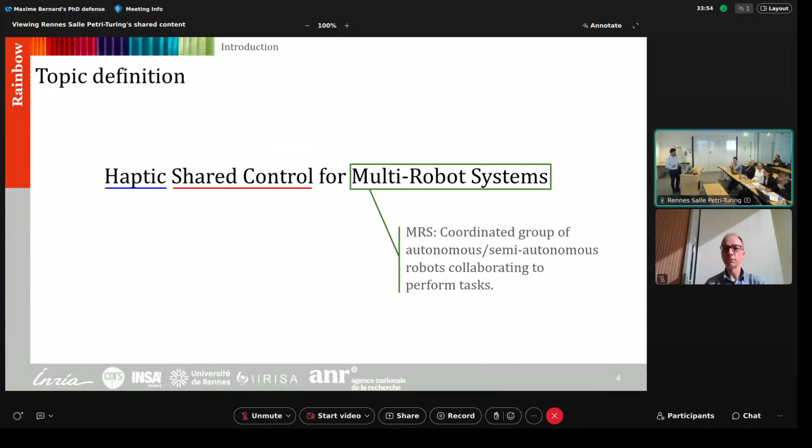So let's start by defining the topic of this thesis. A multi-robot system refers to a group of autonomous or semi-autonomous robots that are designed to operate collaboratively within a shared environment to achieve common or distributed goals. They rely on coordination strategies, communication protocols, and task allocation methods to function effectively as a collective.

On the second hand, shared control refers to a framework where both the human operator and the robotic system contribute to the control of the robot. The control authority is dynamically or continuously distributed between the two entities, and the goal is to combine the strengths of human intuition with the precision and accuracy of robot autonomy. It is especially valuable in complex or dynamic environments, such as assistive robotics, teleoperation, or search and rescue.

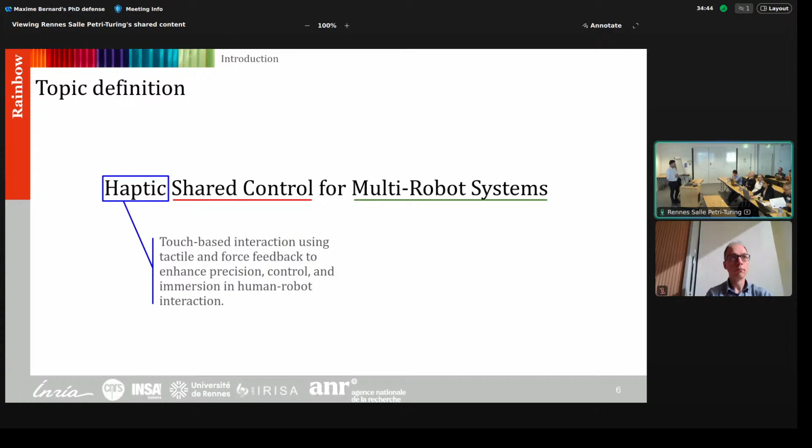And finally, haptic in robotics refers to technologies that provide tactile and force feedback, allowing users to physically feel and interact with remote or virtual environments.

So the outline of the presentation is as follows. I will start by presenting related works from the literature. Then I will introduce the first contribution, which is connectivity maintenance with field of view constraints. In the second part, I will introduce a few shared control approaches, allowing the user to control the group of robots with different levels of authority. And finally, I will conclude my presentation.

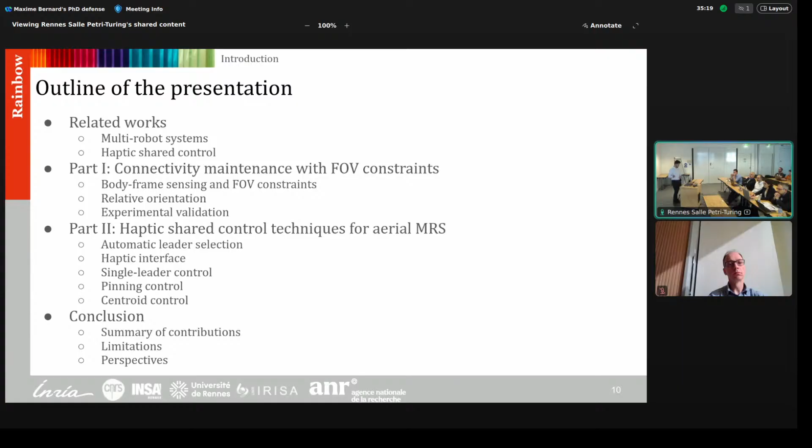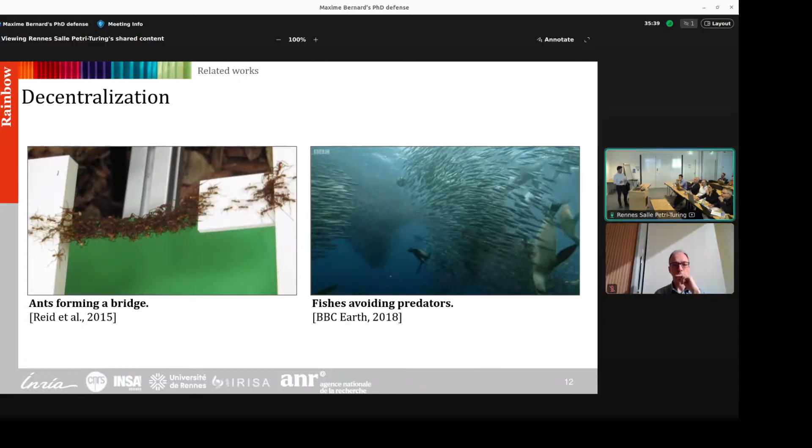So let's start with multi-robot systems. In multi-agent systems, scalability is often achieved through decentralization, which, unlike a central system, where a single controller manages all the agents, for a decentralized system, we rely on local communication and sensing to allow each agent to contribute to the overall objective independently. It can be seen in nature, such as ants collaborating to reach a distant target, or fishes that avoid predators and lure them with these big motions. So in robotics, decentralization is a central topic because it enables scalable and robust operation, which is fundamental for multi-robot systems.

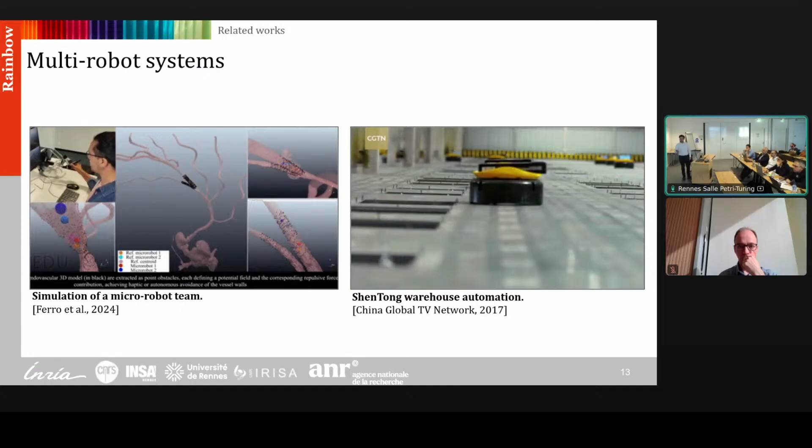So multi-robot systems can be used in a wide range of domains, such as surgical application or warehouse automation. So on the left, we see a shared control simulation where a human operator is controlling multiple robots in a vascular system. And on the right, we see a warehouse of a Chinese delivery company where robots help the humans to deliver packages.

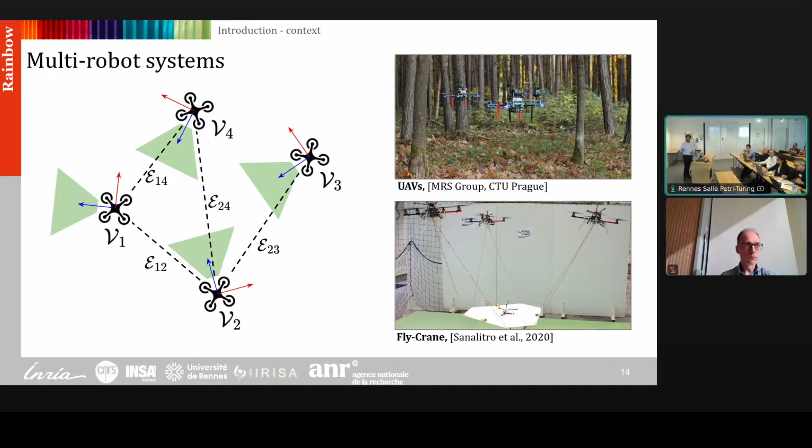So in the literature, various approaches were explored when it comes to control of multi-robot systems. We broadly define them in two categories: rigid formation control, which requires maintaining inter-agent measurements such as distance, relative position, or orientation constant. So that's what we see in the example here. Or flexible formation control, which on the other hand allows these measurements to change over time, which enables the formation to adapt to environmental constraints and task requirements, while preserving overall cohesion. So this example shows flocking, which is similar to the fish example we saw before.

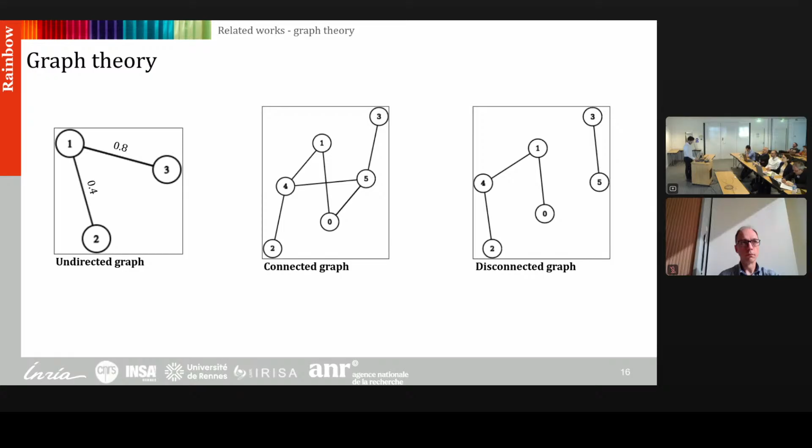When controlling multi-robot systems, ensuring global connectivity is essential because it's sometimes the main requirement for decentralized applications such as consensus, flocking, leader-follower strategies, or other collaborative operations. And so the connectivity maintenance algorithm enables the preservation of global connectivity within the team, which makes, in our opinion, a robust and essential foundation for any decentralized multi-robot application.

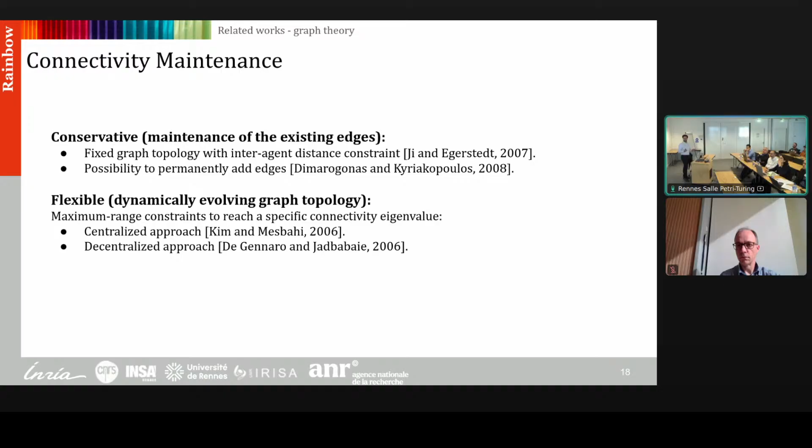And in the literature, for maintaining connectivity, we find two predominant approaches. The first approach is conservative methods, which aim to maintain the existing edges. Some methods allow for the appearance of new edges in the graph. However, no edge can be dissolved. On the other hand, flexible approaches allow for the dynamic modification of the graph topology, which permits adding or removing edges as long as global connectivity is maintained. In the scope of this thesis, we will focus on the second approach, and in particular, this work introduced by Paolo Giordano in 2013. This strategy is capable of handling complex sensing models and dynamically forming or dissolving inter-agent links while preserving global connectivity.

So we use the cost function of lambda2 to have a vertical asymptote when the value of lambda2 approaches the minimum value, and to smoothly decrease to 0 when the connectivity eigenvalue increases. And we designed a gradient-based controller that is designed to minimize the cost function V(lambda). So by having each agent of the group implement this force, the connectivity eigenvalue is maintained above the positive threshold lambda2 min.

So to implement the gradient-based controller, each agent follows the generalized connectivity force. And if we develop the control input for agent i, we see the element of the eigenvector v2 that is associated with the eigenvalue lambda2 appearing in the equation.

This value and the connectivity eigenvalue can be estimated in a decentralized way using a combination of different estimators. And we also see that if the weights in between the agents and their gradients are designed to be computable from locally available information, the connectivity maintenance law can be implemented by agent i in a decentralized way.

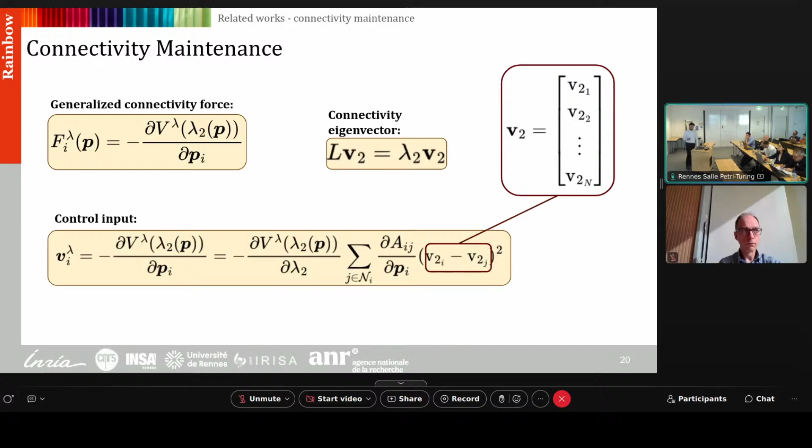In the literature, we can find many applications of haptic shared control in many fields, such as the remote operation of robotic arms. So the robotic arms automatically handle different constraints, such as collisions, joint limits, and singularities. And haptic guidance and shared control algorithms simplify the execution of grasping tasks.

Haptic shared control has also been applied to a team of drones. So in this work, the authors show how a human subject can be part of a robotic team while being guided through wearable haptic devices to maintain connectivity with the robotic team.

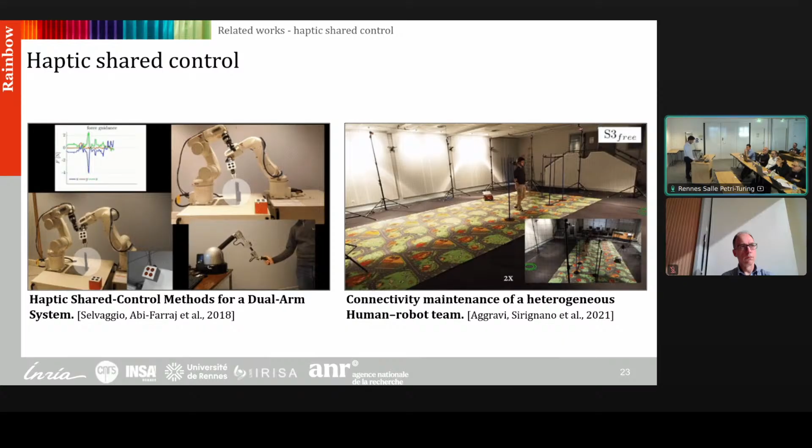So let's dive into the first contribution of our work, connectivity maintenance with field of view constraints. So all previous work in the literature on connectivity maintenance treated agents as point masses without orientation and assumed undirected sensing graphs, meaning that if one agent could sense the other, the reverse was automatically true. Our work challenges these assumptions to better reflect real-world scenarios, but introduces significant algorithmic challenges.

So we assume each agent is equipped with an IMU, a radio communication device, and a calibrated camera with a limited field of view, providing relative position measurements in the body frame of the agent. We consider measurements in the body frame of the agent instead of a common frame. And we propose to adapt the connectivity algorithm to account for this limited field of view sensor. So we need to extend the algorithm to control not only the linear velocities, but also the angular velocities of the agent. So the dynamics look like so.

The connectivity maintenance algorithm requires weights with specific properties. So they should remain constant at a maximum value when the agents are well connected and smoothly decrease to 0 as the connectivity weakens. And finally, the weight must also have a vanishing derivative as it approaches 0. So we introduced this standard interdistance weight that aims to keep neighboring agents within a bounded and desirable distance from one another.

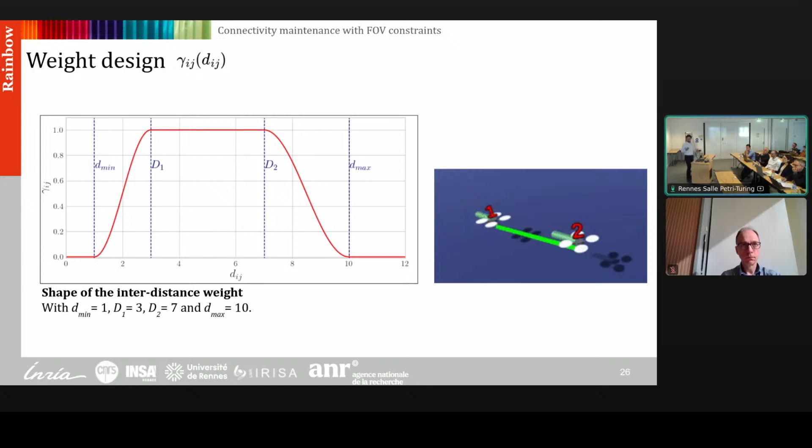So it starts at 0 when the agent interdistance is too small. It increases smoothly to a maximum value of 1 as the distance enters the preferred range. And within this range, it remains constant. And finally, when the distance is too great, it decreases smoothly to 0 again. In practice, this helps ensure that the agents remain within an appropriate communication range, and also that the onboard camera can perceive the neighboring agents, avoiding situations where the agents are either too close or too far away to be sensed.

The second weight we introduce is designed on the visibility function that we introduce here. So this visibility function depends on the cosine of the angle between two directions, the direction of the onboard camera and the direction of the neighboring agent. When this angle is low, the function is high, the weight is 1, which means that when the neighboring agent is near the center of the field of view of the onboard camera, the weight is high.

And as the agent goes away, the weight decreases, and we see the corresponding velocity input, which we will detail later, acting on the robot here. However, this function cannot serve as the weight directly in the connectivity maintenance algorithm because it's not symmetrical.

And while we consider asymmetric sensing capabilities, we need a symmetric graph for the connectivity maintenance algorithm. So to ensure symmetry in this interaction, we define the field of view weight as a composition of the visibility function. As two connected agents can communicate together, the relative measurement can be communicated. So we do not need to impose mutual visibility between two agents.

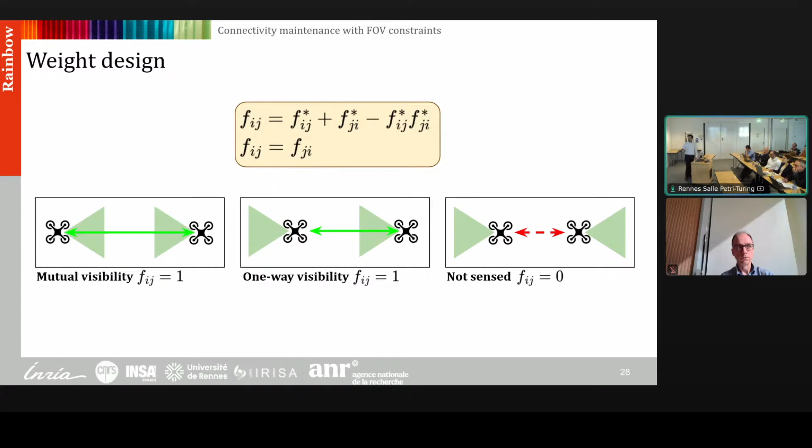And so this design choice allows the weight between a pair of agents to reach a maximum value whenever at least one agent sees the other, which is the case here. However, of course, when two agents are not able to see each other, the weight is 0, so they are disconnected. So now the linear and angular control input of the connectivity maintenance algorithm are defined as follows. So we recall that this value can be estimated in a decentralized way.

And by developing the gradient of the weight, we observe the appearance of a transition matrix. It appears because we consider body frame measurements, and it depends on the relative orientation between two agents. While some works in the literature demonstrate technical applications of relative orientation measurements between two agents, this task remains challenging when we use only onboard cameras. And this is particularly true for drones because the symmetrical structure makes it difficult to distinguish orientation.

So in this work, we propose an estimation method based on the relative position measurement combined with inter-agent communication. Our initial approach is to estimate the velocity of a neighboring robot, so robot J, in the body frame of robot I. Then robot J communicates its own velocity in its own body frame, and the angle between the two velocities here is the relative orientation between the two body frames.

However, with this method, we do not use all the information available, and this estimation strategy is only reliable under certain conditions. Specifically, if the robot J is stationary or aligned with the vertical direction, the estimated velocity appears identical in both frames. And so this method is impossible to use in this case. So we propose a more complete method using all the available information. So psi hat will be the estimation from the previous technique.

And by incorporating the angular velocity of the agents that are either measured or communicated, we define a new estimator that has these dynamics. And we can consider two cases. First, when the agents are mutually visible, the product of the two visibility functions is 1. And so they both measure relative position, and the angle between those two relative position measurements is the angle between the two body frames. And so the measurement corrects the estimation based on odometry only.

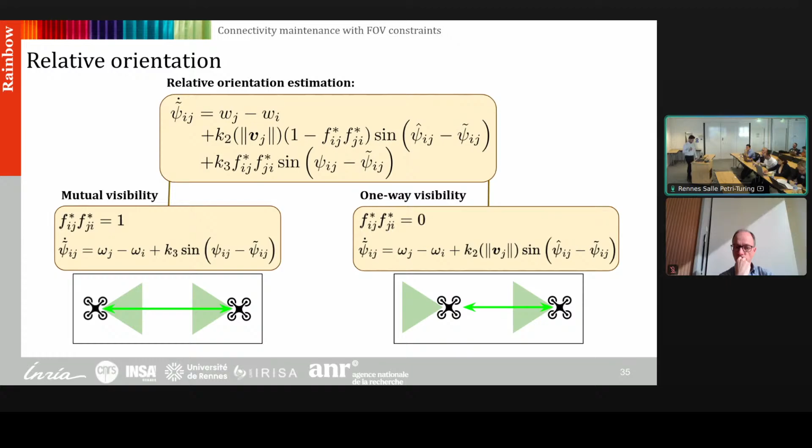And in the second case, when only one agent sees the other, we use the method from the previous slide, which corrects the forward odometry propagation. However, we also assign a gain that decreases and vanishes when the velocity of the observed agent is low in order to avoid using unreliable measurements. So now that we designed this algorithm, we want to validate it in experimental simulation.

So here is a brief overview of the system architecture. We use several ROS2 nodes to process user input and compute velocity commands for the drones. Each drone runs as an individual ROS2 node and can communicate and sense only with its directly connected neighbors. The velocity commands are sent to a genom3 component that simulates the dynamics of Mikrokopter drones, which are the drones we had in the lab. And finally, the drone state is forwarded to a Unity visualization for the user visual interface.

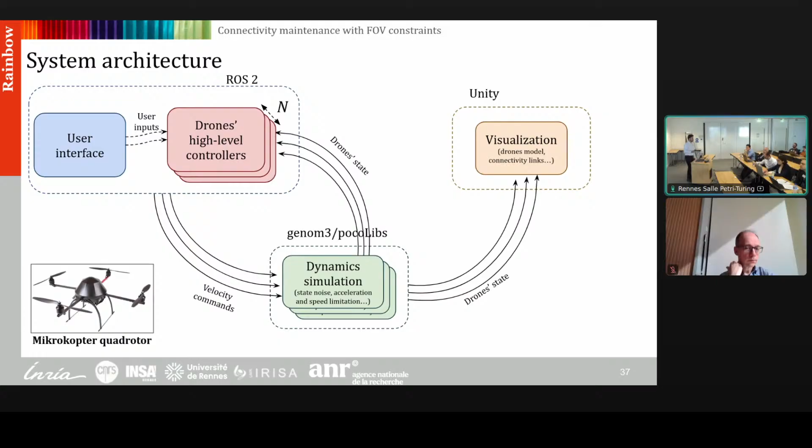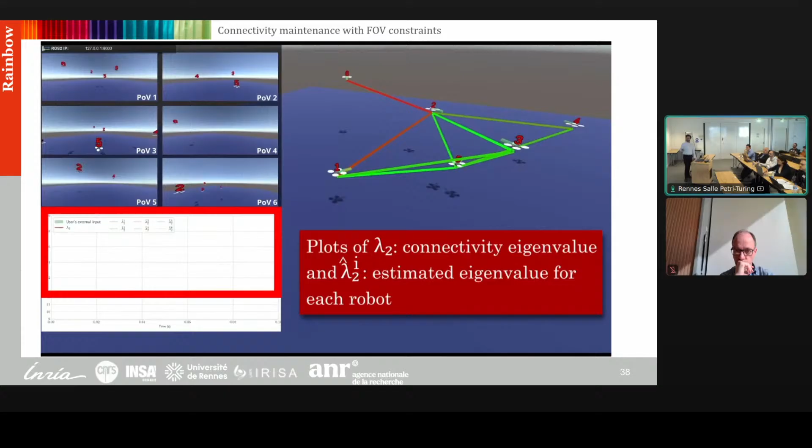So here is how it looks in the video. So on the top left, we provide the onboard camera view of each agent. Here are the models of the agents, and the green cylinder shows the onboard camera direction. The plot of the connectivity value is shown here alongside the plot of the estimated values. And here we show the number of links in the graph. Here are the two weights we presented just now, so the field of view weight and the interdistance weight.

You see the blue arrows, which are the contribution of the weights. The colored links show the connectivity, the value of the weight. So when it's red, it's close to 0. When it's green, it's close to 1. And when we enable the connectivity maintenance algorithm, we see the weights are increased so that the connectivity value rises up to a certain fixed maximum value.

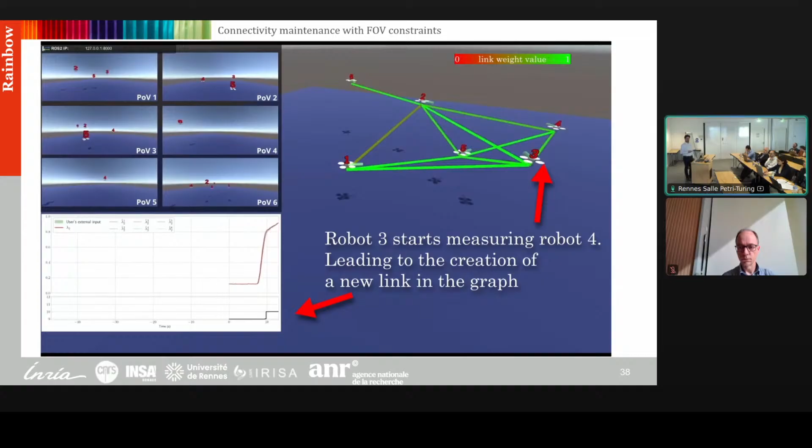Also, we note that it's not possible for the algorithm to create new links, only when a drone starts sensing another one is a link created and the connectivity value can increase. That's why here we reach a local maximum for the connectivity value.

Now a user will start to impart commands on one drone. We will see blue arrows showing the user input, and we will see how the neighboring agents adapt to these control inputs. Here the user is rotating the drone, so one weight decreases, but the agent starts sensing a new neighbor, and so a link is created and the weight increases. The green patches show when the user is controlling the agent.

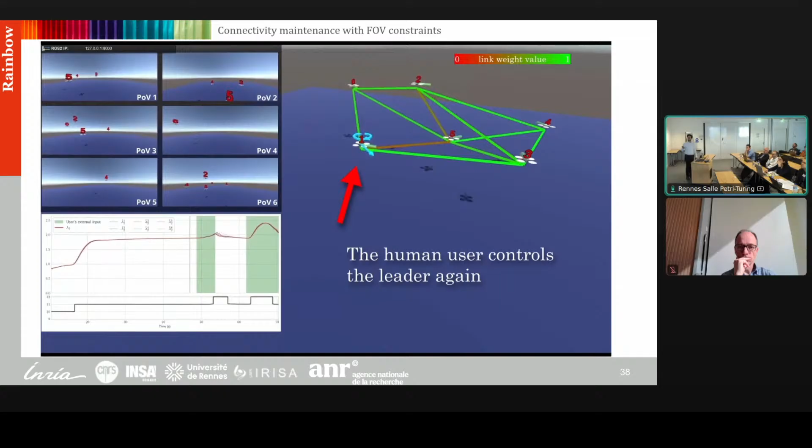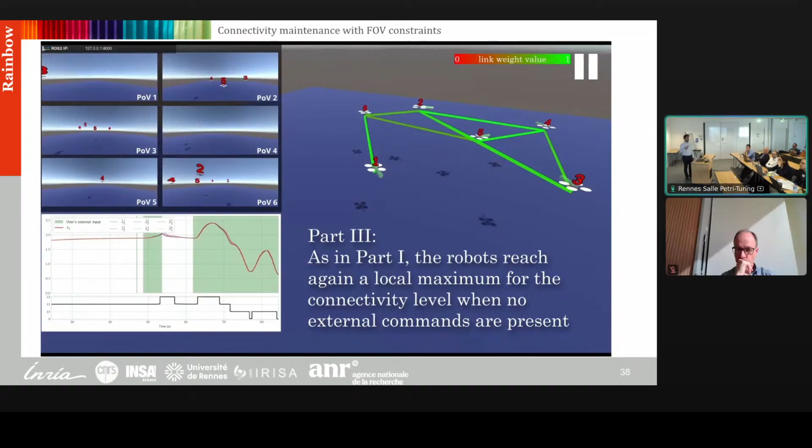Interestingly, when the human is rotating the drone in such a way that drone 3 is going to lose connectivity, drone 3 adapts to this input by going forwards to remain in the field of view of agent 1. However, here the user counteracts the connectivity maintenance force and goes too fast for drone 3 to adapt, so the link is lost. In this control architecture, the user is using a classic joystick controller to control the agents.

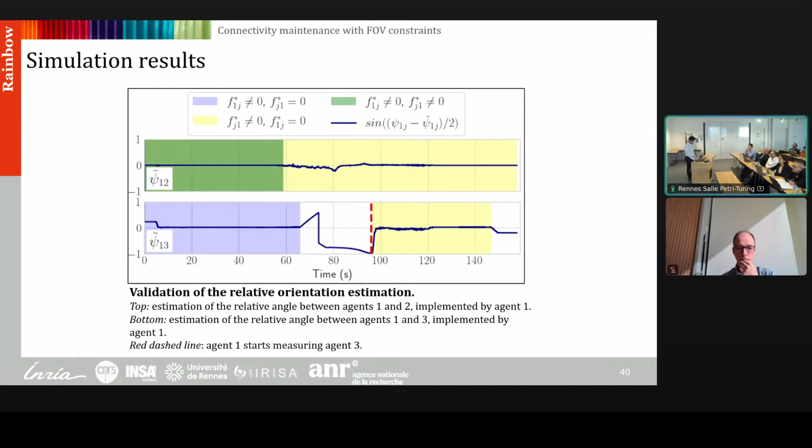So let's now dive into the second part: the design of different haptic shared control methods for aerial multi-robot systems using connectivity maintenance. We want to improve the way users control the multi-robot system.

We designed an interface that offers 3 varying levels of control over the group. First, the user can precisely control a single agent of the group, particularly useful for tasks requiring fine maneuvers, such as inspecting a point of interest or interacting with the environment. Secondly, the user can select a subset of agents from the group to steer them towards a desired location, enabling flexible local interventions. Finally, we provide control over the entire formation at once, allowing the user to efficiently move the team over long distances.

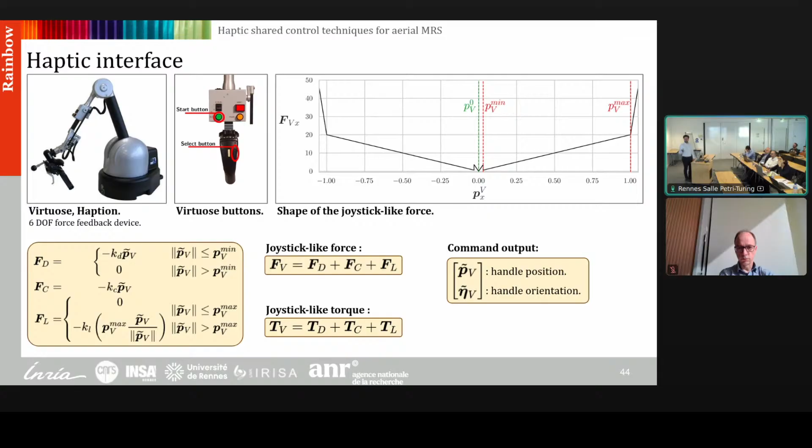This is actually the centering force, the spring guiding the user back towards the center of the workspace. The workspace is limited by the workspace limit force, which aims to have homogeneous commands and to restrain the user within a sphere. These are the linear forces, but the haptic device is 6 degrees of freedom, so we design similar forces for the torque feedback.

Let's now introduce the control and feedback conditions for these techniques. So the 3 control techniques are associated with 2 feedback conditions.

The first one, where there is no haptic feedback, only the joystick-like forces and torques are applied on the Virtuose handle. The second case is the haptic enabled case, where the user feels both the joystick-like forces and additional forces and torques that reflect the states of the robotic team. By adding haptic feedback, our goal is to enhance the user's situational awareness and help them better understand how their control input influences the connectivity maintenance forces acting within the team.

In the first case, where there is no haptic feedback, the Virtuose handle outputs a command, which is a linear command and angular command, the difference in position between the idle position and the idle orientation of the handle. A control interface that depends on the control method used will then compute a velocity command that is sent to the control agents.

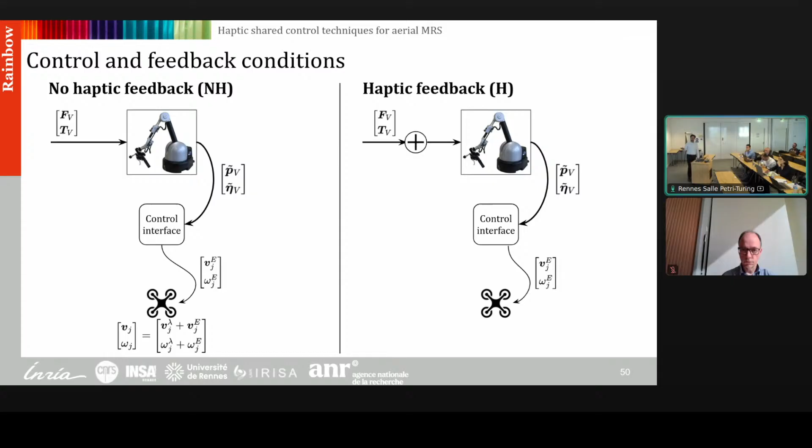The control agent follows the connectivity maintenance force as well as the external input from the user. With the haptic enabled case, the same output is provided by the Virtuose device, and the external input stays the same. However, this time the control interface also computes a residual connectivity force input that is followed by the agent instead of the actual connectivity force, which is sent back to the control interface to serve as force feedback, added to the joystick-like forces applied to the Virtuose handle.

All these values will be different depending on the control method we use, and that's what I will introduce now. Let's start with the single agent control mode, when the operator controls one agent at a time.

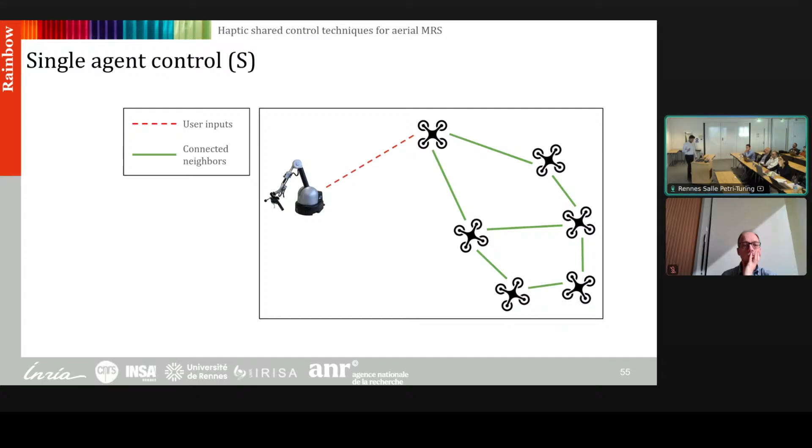The external control input is just a scaled version of the command outputs from the Virtuose device. In the haptic-enabled case, the external input is the same. However, this time the controlled agent does not follow the connectivity maintenance force at all, which is instead fed back to the user through the Virtuose handle as a scaled version.

We conduct a user study for all three control modes, experimenting with different haptic feedback modalities. The user study consisted of this architecture, where users operated the Virtuose device in front of a flat screen showing the scene, which depends on the scenario and control method used.

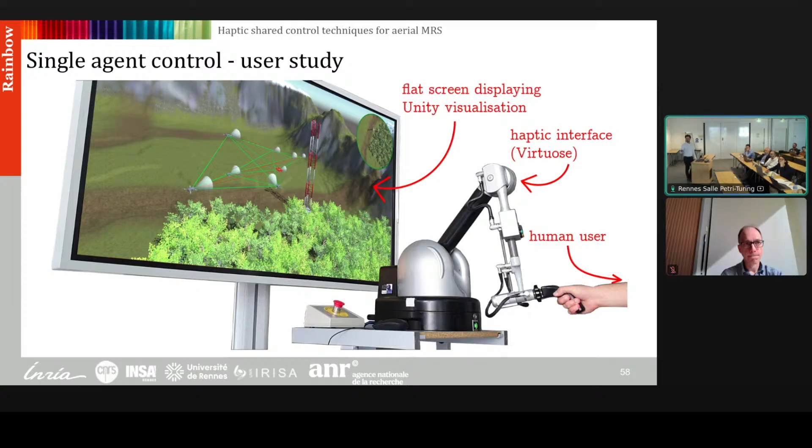In the single agent control mode, the user was tasked to sequentially reach objective locations using a specific drone. The goal here is that as decentralization enables scaling of the team, by equipping agents with different sensors, we can also scale the variety of sensor capabilities of the team.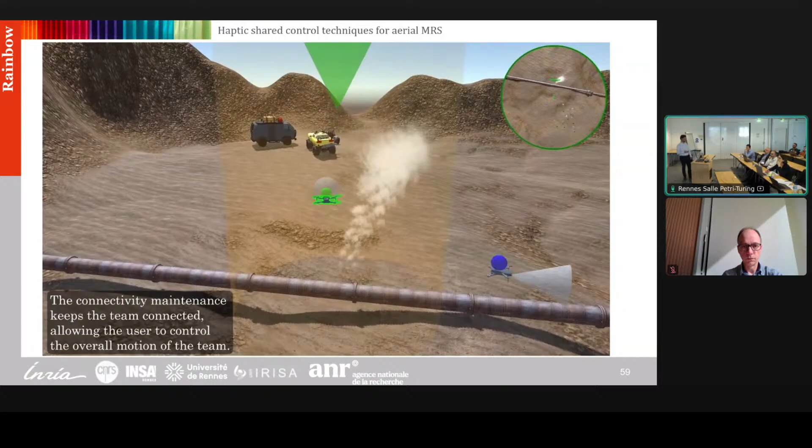In these experiments, we consider 3 types of sensors, shown using the colors around the drones, and multiple agents carry the same sensor to ensure redundancy. For example, the green color represents a gas sensor, and the red could represent an infrared camera to analyze hotspots in a structure. At each objective location, there is a colored arrow showing which sensor needs to reach this location.

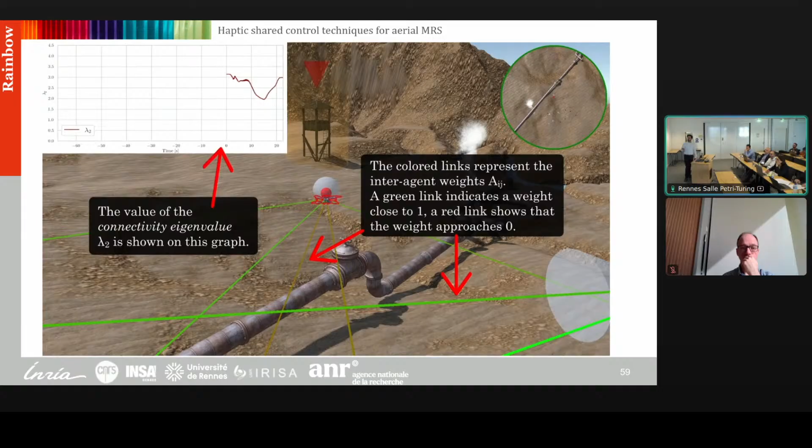During the experiment, the user could only see the agent, the scene, and the objectives. For analysis, we show the connectivity weight lines as well as the plot here and the haptic force felt by the user. The gray cylinder shows the direction of the onboard camera of the agents.

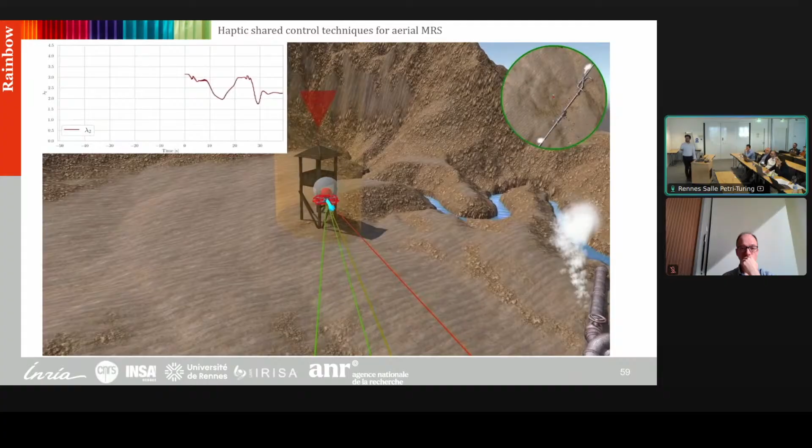We see that the user is controlling one agent to reach the objective. Once the objective is reached, the user changes the controlled drone to adapt to the next objective requirement. The user was also provided with a top view camera of the scene.

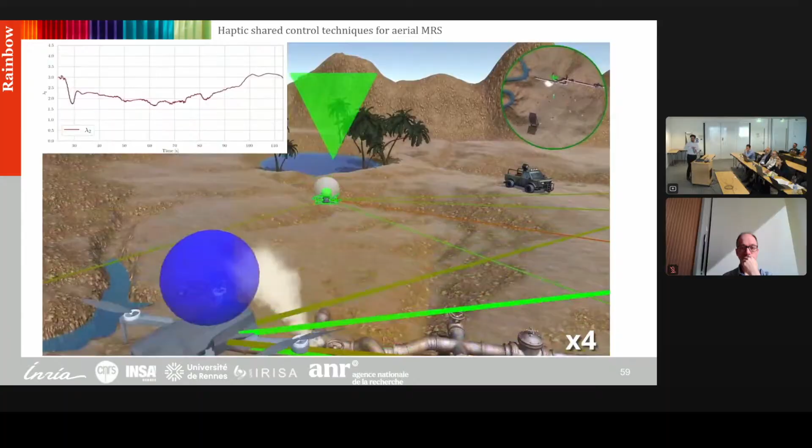The second control method is pinning control. In this case, the user has control over a virtual pinning point that pulls selected agents from the group towards an orbit around this pinning point. The user can also impart orbital control over the pinned agents by rotating the Virtuose handle.

The control inputs in the no haptic feedback case look like this. The pinning point has dynamics, and same as for the single agent control, it is controlled directly from a scaled version of the command output from the Virtuose device. The control inputs sent to the pinned drones are actually only linear velocities; the angular motions of the agents are not controlled by the pinning method.

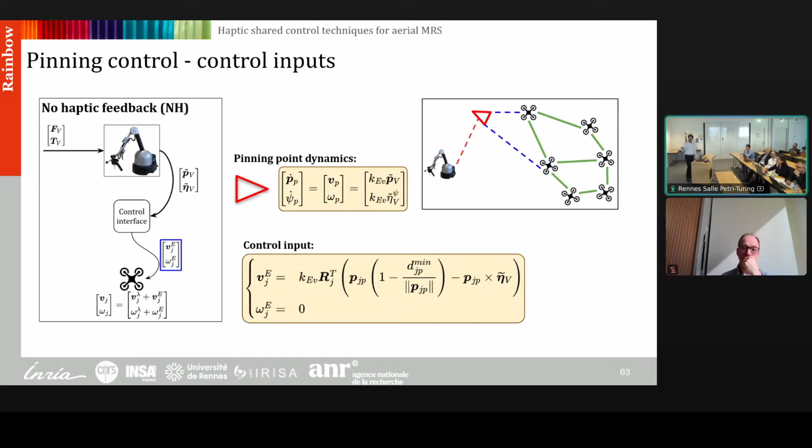So we see on this illustration how the user can control the team. We see that when rotating the pinning point, the agents are orbiting around the pinning point. So it's not a fixed formation control, which means that the agents are pulled with spring-like forces. And we see that when the pinning point goes away from the pinned drones, they are pulled towards the orbit of the pinning point.

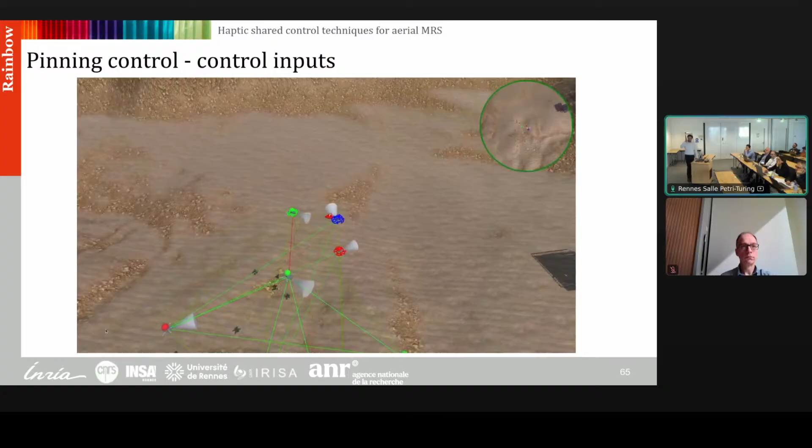In this case, we also allow the user to click on agents to pin or unpin them and control them, to select which agents are pinned in the group.

And so that's for the control inputs. Now in the haptic feedback enabled mode, the control inputs are again the same, but this time for the haptic feedback. So first for the residual connectivity maintenance action, which I recall is the connectivity force followed by the pinned agents, is a scaled down version of the actual connectivity force.

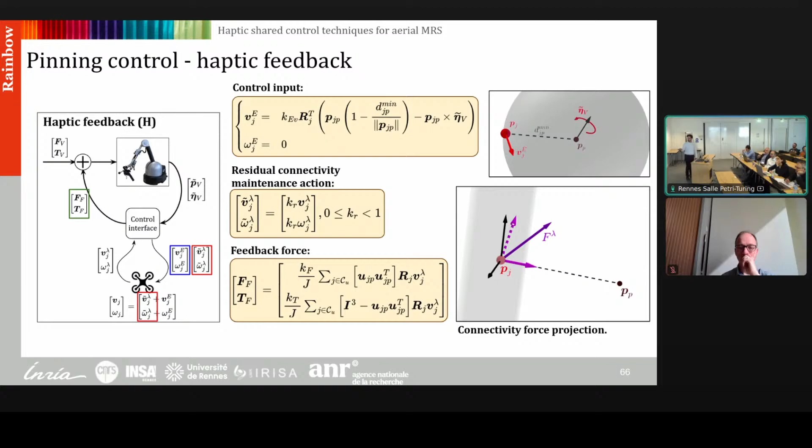And the force feedback is decomposed into two components. One component is projected on the tangent plane on the sphere of the orbit of the pinning point. This component will be fed back to the user as torque feedback. And the other component is projected on the direction linking the pinned agent towards the pinning point, and this is a linear force feedback.

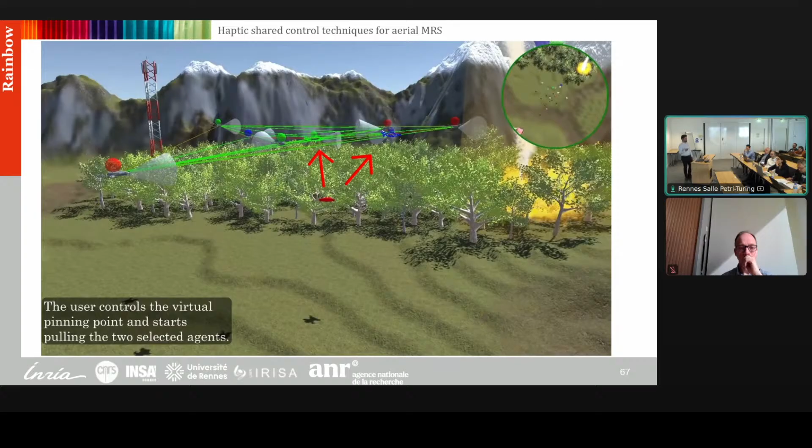So the user study was a bit different from the single agent mode because now we control multiple agents from the group. This time the objective locations have two colors, so they require two types of sensors at the location. We could imagine in a real world scenario having one agent with a classic camera to inspect the scene and the other having, for instance, a gas sensor to identify the type of smoke.

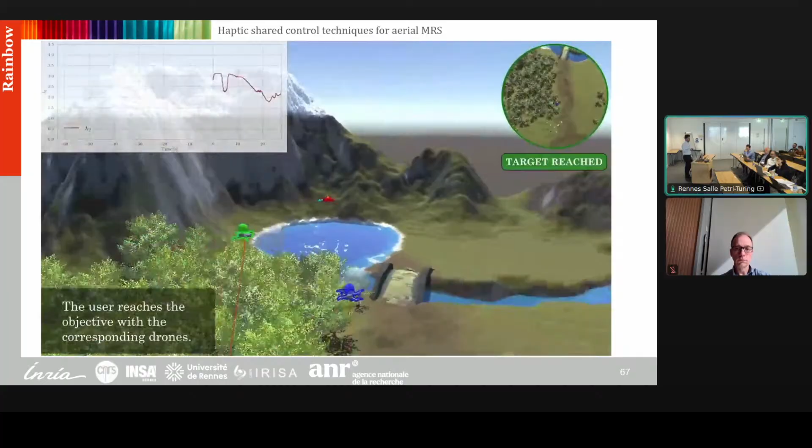So here is the pinning point. Here is the objective with the two colors we see a bit behind. Once the user reaches the objective location, a new one is designed with new types of agents required for this location. The blue arrow shows the force feedback experienced by the user, but I recall that the user does not see this arrow, they only feel it in the haptic enabled case.

So this experiment showed these results. We observed no statistical difference for the experienced intuitiveness and the completion time. However, the user felt that their effectiveness was statistically higher.

So this is the median, sorry, the star is the median and the line is the median and the star is the mean.

So we think that the user felt more effective with the haptic force feedback enabled because they could feel the resistance from the pinned agent, and so they could understand why sometimes the agents would slow down, which is in fact to maintain a desired distance with the other agents.

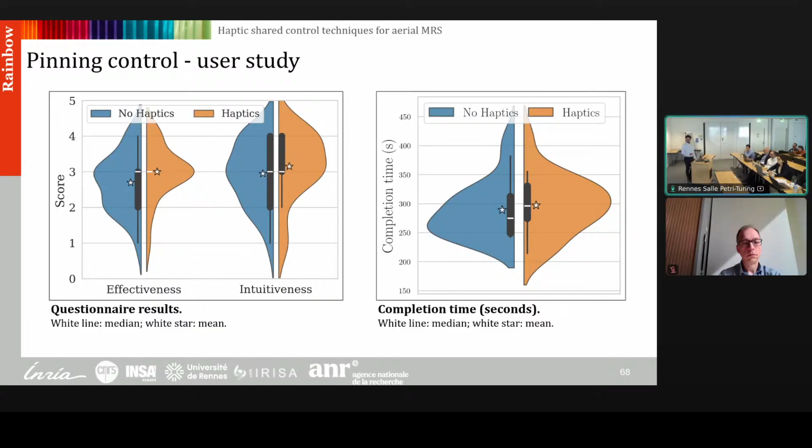And the last control mode we introduce is the centroid control mode, where the user imparts commands on the whole team at once. So the actual position of the centroid of the group is not actually controlled. It's computed as the average position of all agents in the team. But while we do not control the centroid's position, we do control its orientation.

So we define a mapping matrix for this control mode because we provide 7 degrees of freedom of control over the team: the 3 linear motions, panning, tilting, and orbiting, and scaling motion. So because the Virtuose handle only has 6 degrees of input capabilities, we need to design a way for the user to impart 7 degrees of control.

The user input is the combination of the mapping matrix with the inputs from the Virtuose device and the vector of gains. We design the centroid control matrix, which holds BP, a binary variable set to 0 or 1, and it is used to switch between pan tilt control and scaling control of the team.

Finally, the control input for one agent is shown as the product of the centroid control matrix and the user inputs.

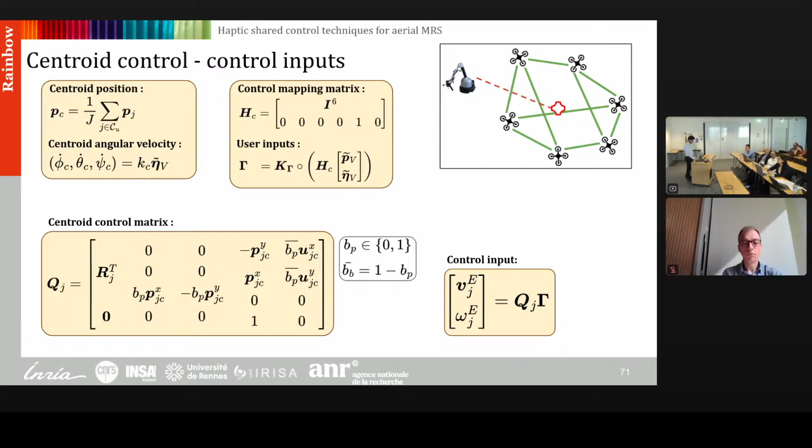So here are shown the degrees of control over the team. This is the scaling motion. We will see the pan tilt motion, and of course the orbiting motions and linear motions of the team.

To provide force feedback in this control mode, we decompose the connectivity maintenance force into 2 components. The first component aligns with the direction of the operator's inputs and is used to generate haptic feedback, which guides the user to maintain connectivity. In practice, connectivity is most impacted when the user scales up or down the formation, so that is when the user will feel more haptic feedback.

And the other part is the residual connectivity force, which corresponds to the remaining directions not controlled by the operator. So as the operator cannot act on these motions, it is sent and followed by the agents as the residual connectivity force. So with this design, if the user strictly follows haptic guidance, the agents receive the full connectivity maintenance force.

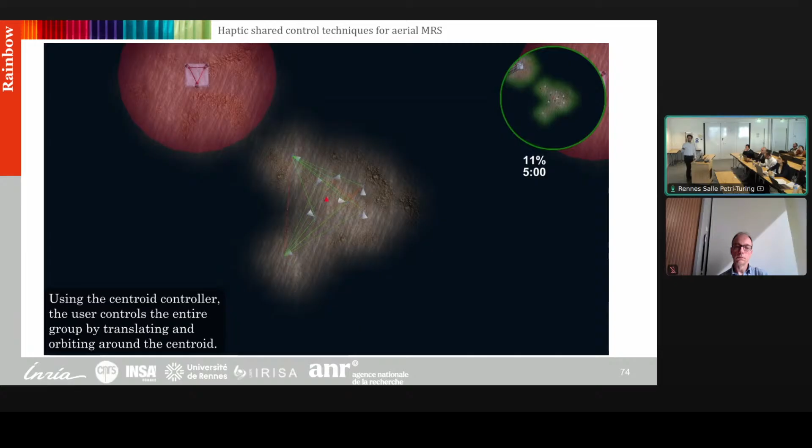So in this case, the experiment was a bit different. The users were tasked to discover an unknown environment within a limit of 5 minutes, to highlight the use of the scaling motions. We also placed areas to avoid in the environment, these red cylinders. When entering these cylinders, the users would receive a penalty.

So the discovered environment increases, as we see on this percentage here. This was shown to the user. And we see that the user scales up to discover as much environment, then scales down the formation to avoid areas to avoid.

In this scenario, the user only had control over the orbit, the scaling, and the linear velocities of the agent, but not on the pan and tilt, because as we see, it's a two-dimensional problem in this specific scenario.

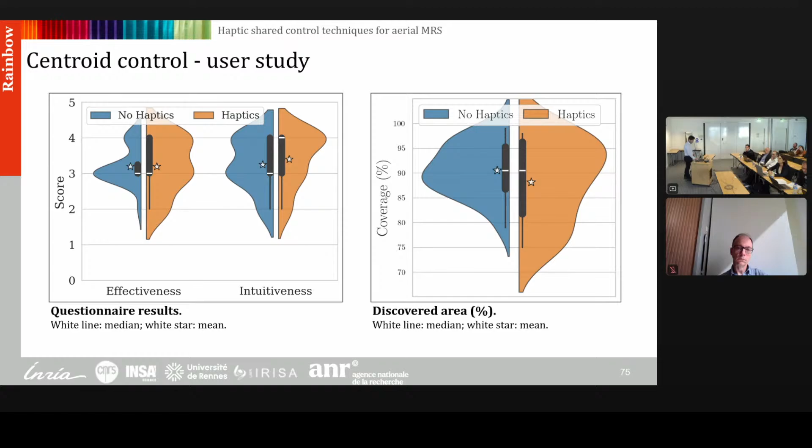So to sum up this user study, we showed that in general, providing haptic feedback to the user achieved better results than providing visual feedback only. Not only did the user feel the control mode to be more intuitive and efficient in most of the cases, the mission objectives were accomplished faster or with better performances. We also think that with trained operators, the performances of haptic feedback methods could overcome the baseline even more.

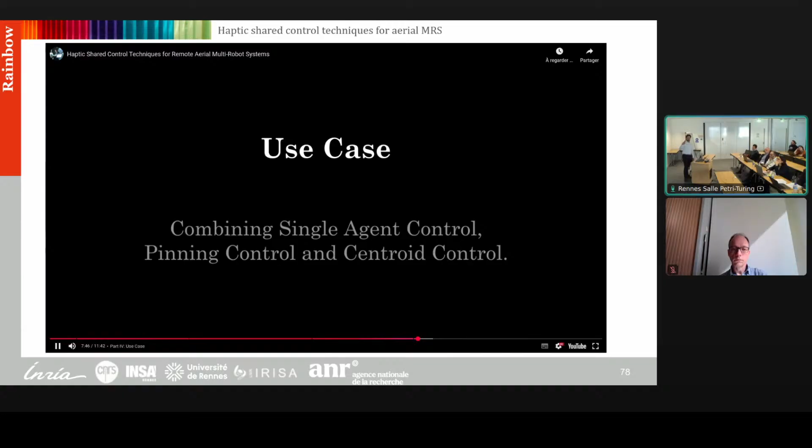Let's now introduce a use case of these control modes. So in this scenario, the remote user can switch dynamically between the different control modes. It is using the same system as for the user study. I will skip a bit the introduction of the video.

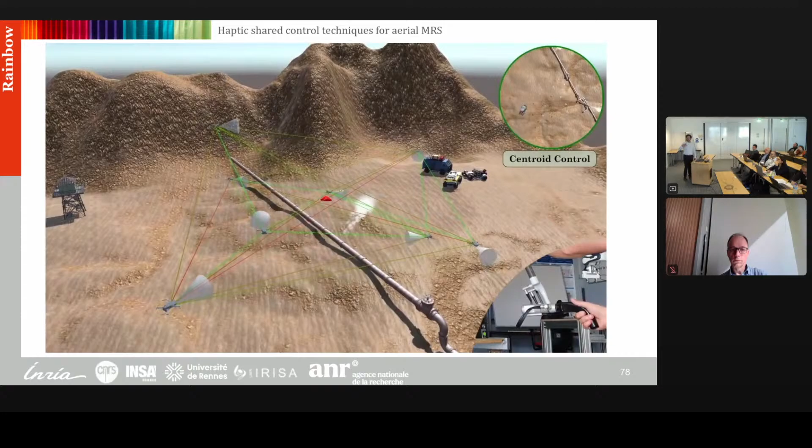So we see that at the beginning of the experiment, the user is controlling the whole team with the centroid formation, the centroid control mode, to reach a distant location. Once the mission area is reached, the user can switch the control mode dynamically, as we see here, in order to control a single agent to scout the objective area.

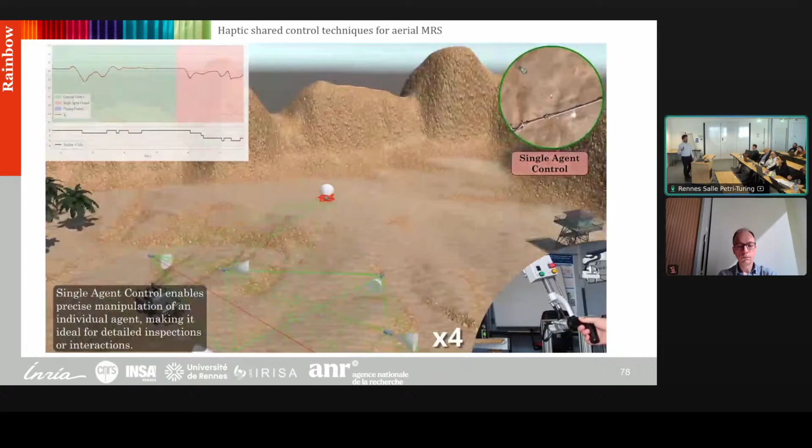So the other agents will maintain connectivity with the control agent as introduced. And once the user reached the point of interest and analyzed what the objectives are at this specific location, they can use the pinning control mode to select a few agents from the group to achieve the task required at this location. We will see a bit after.

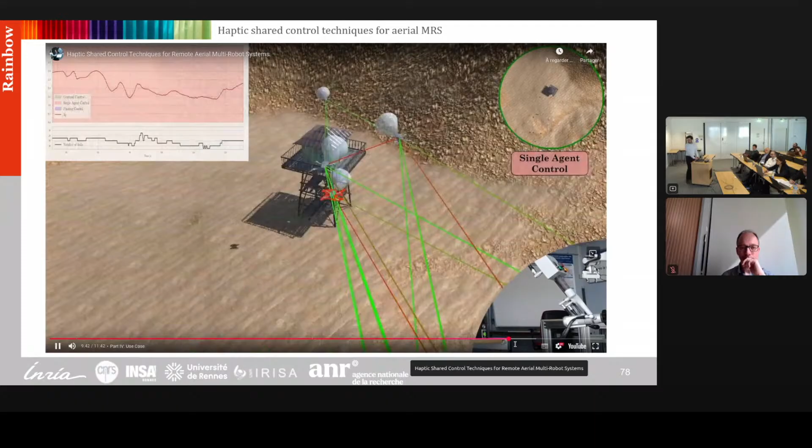Here, the user switches to pinning control mode, so the virtual point appears again at the center here. And using the mouse, the user can click on different agents to select them and start controlling them using the pinning control method.

Okay, so to conclude this presentation, I will do a summary of the contributions. So the first two are that we consider connectivity maintenance with body frame measurements and limited field of view. We also propose a new relative orientation estimation method. This work was published in IROS.

Then on the second part, we showed multiple haptic-enabled shared control methods, and we did a user study to compare these methods with the haptic-disabled cases. This work is under review at Transactions on Human-Machine Systems. Finally, all these theses led to the development of many software tools that will hopefully be available to the community soon.

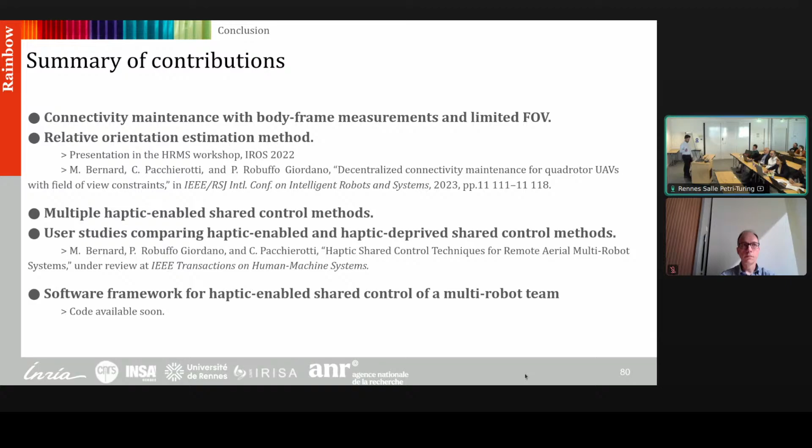The limitations of this work are that the current haptic modality is limited to force feedback, while we could improve the user information feedback using vibrotactile or other kinds of haptic feedback.

The connectivity maintenance algorithm does not account for the pitch and roll motions of the agents. So in the case of quad rotors, when accelerating, the agents are panning and tilting, which can change the field of view and the visibility of the camera, which is not accounted for in this algorithm. So aggressive maneuvers might make one agent lose its sensing capabilities.

The recovery from the loss of global connectivity is not possible with this architecture. There is no line of sight occlusion avoidance capabilities. And also, it's impossible to add or remove agents from the group. However, this limitation has started to be addressed in the team.

And finally, some perspectives, which cover of course the limitations or having real-world experiments. We also think that using this algorithm as a baseline for any decentralized applications, such as coverage or collaborative SLAM, could be useful. And finally, I wanted to introduce this challenge, the DARPA challenge, where agents and teams

were tasked to find and locate artifacts in underground and subterranean environments, where communication with the external world is really complicated. In this case, maintaining connectivity with the team allows a remote operator to access distant robots that are deep into the tunnels through an ad hoc network, with communication passing through any agents.

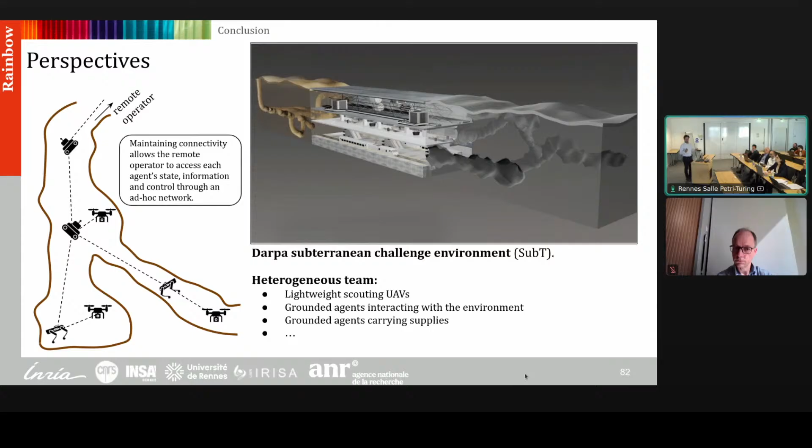And so that's the conclusion of my presentation. I thank you for your attention.

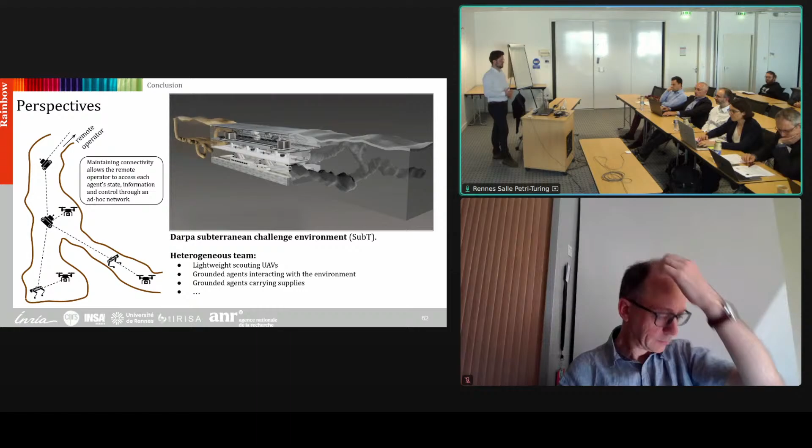I think it's the main topic to address. But having real-world experiments and providing more haptic feedback through different modalities, such as tactile and others, I think these are also really interesting subjects for this research in particular.

Thank you. Thank you for the questions. Thank you. So let's continue with the second reviewer. So Claudio. Thank you very much. First of all, I would like to thank the supervisor for inviting me. It's a pleasure to come here. I really enjoyed reading your thesis. I also enjoyed the presentation. There was a very nice video illustration and so on. This really adds new useful information to the manuscript.

So I will start with a general comment and then maybe enter a little bit more into the details. As my colleagues already pointed out, the simulations that you did are really interesting. They show very well the idea and the results. But then the question is, okay, the simulations are realistic, but what happens in the real world? Francesco already mentioned the problem of delays, the problem of noisy measurements, especially outdoor.

So it will be very interesting to see if the algorithms that you propose are actually robust to this kind of noisy measurement. It would be interesting to investigate this point a bit more in the future and do maybe some simple experiment with a couple of robots just to see what happens.

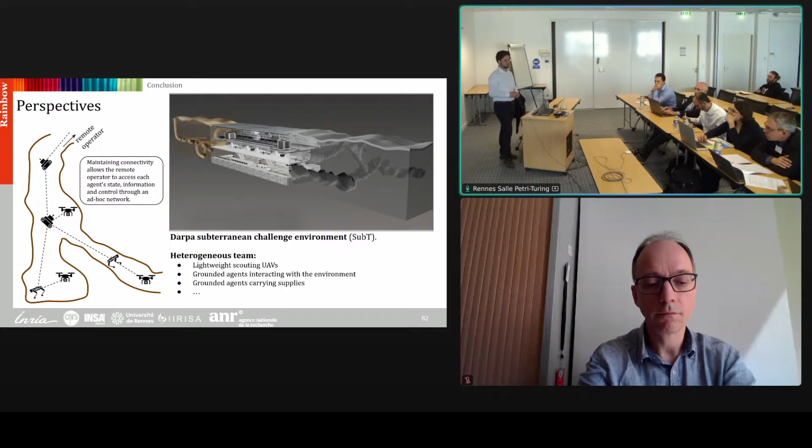And to cover for this relative position and orientation measurement, I'm going to show it because I prepared a slide for it. You saw it in the manuscript also, the system from the Czech University, which in this case uses 360 degrees of sensing. And this works in a real-world application, because it uses UV-emitting LEDs,

and there is no UV-emitting object in the world except the sun. So they are able to have really reliable measurements with this system. And I think it will fit well with the algorithm I presented. Okay, so then I have a more specific question.

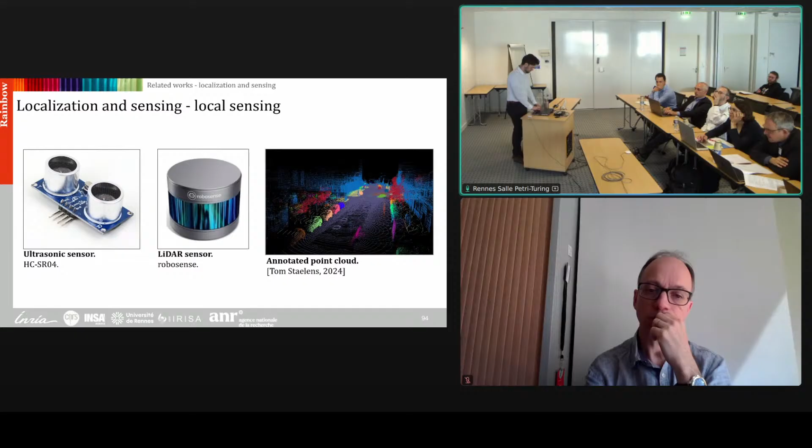In your slide 16, you mentioned that you are modeling the group of robots using graph theory. And here you only mentioned undirected graphs. Yes. Here you are only referring, as far as I understood, to the communication graph. Because if you consider the visibility part, if you have a camera, it would be more natural to model this as a directed graph. Yes. Okay? And so the computation of the Fiedler value here is for the communication graph.

Is that correct? The sensing graph is directed, but with the trick to make the weights symmetric, the graph we consider is undirected, both in terms of sensing and communication capabilities, because we assume that when one agent is able to measure a neighbor, they can communicate the measured value. So this, in our opinion, renders not the actual technical sensing graph, but an abstract undirected sensing graph.

Yeah, because the Fiedler value of a directed graph is not necessarily a real number. Yes, exactly. And we need a real number for the algorithm to work. Okay. Then I have a couple of remarks. The first question was, you mentioned that you need an estimator to estimate the components of the Fiedler vector. Yes. And you mentioned quickly in the manuscript that you are using a PI average consensus estimator.

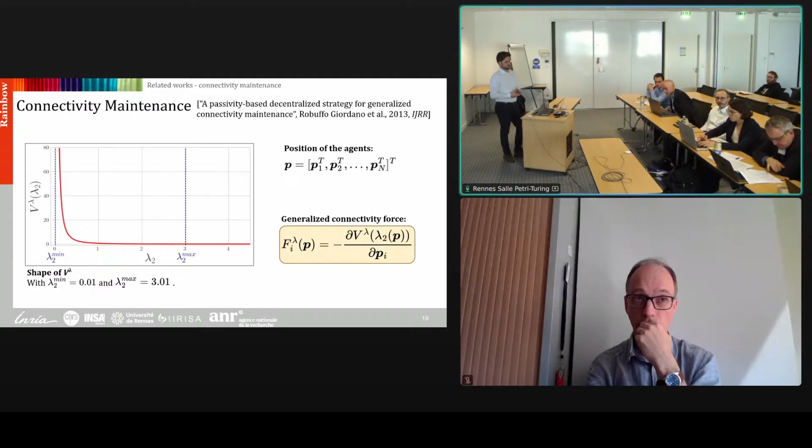Okay, so another question was about the sensing assumption. This was slide 25. What you put in the slide is a bit different compared to what you mentioned in the manuscript in section 3.2. In the manuscript, you mentioned that each drone only needs two sensors: a camera-like sensor with a limited field of view, and a range sensor that has 360-degree field of view. But here you mentioned only a calibrated camera, so why this difference?

So in the presentation, I wanted to really focus on the connectivity maintenance algorithm. And in the paper, the introduction of this 360 low-cost sensor is to ensure collision avoidance. Because of the limited field of view of the camera, we cannot avoid collision efficiently. So the agents would need to be equipped with something such as a laser range sensor to identify how to avoid obstacles and collisions.

And also, I did not present it here, but this other sensor is not used in the connectivity maintenance algorithm, but instead in a reactive controller, which is just when the distance is too short, the agent will be repelled from the measured obstacle. Yeah, because also when you answered the question of my colleagues, you said that you got distance measurement from the camera. Yes. But if you have a monocular camera, how can you get distance measurement?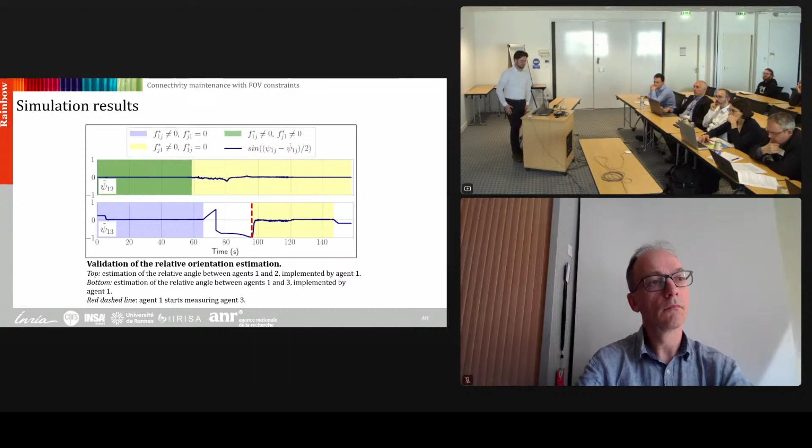However, in terms of mathematical analysis, I cannot explain more. Also, in the previous slide, we can see, just right after the red band, the green band, sorry - you can see that the error tends to be large.

What happens there? So here there is a new link that is created and quickly disappears. And so the time for the algorithm to converge explains this error, in these plots of the estimated value onboard the drones. That's why we don't have the same phenomenon at the end of the second band, the second green area.

This error is not related to the green patch. The green patch is when the user is controlling. It's really related to the addition and disappearance of links, and having only one link, because the estimator works on neighboring information - it's based on consensus estimation. So when a new link is added, new information is received for the estimation, and when a link disappears, the information disappears. This jump is really because of the quick appearance and disappearance of a link within the graph.

Okay, so then in the last part, the second contribution, I have a few questions about the different modalities. For example, when you presented the pinning modality, you mentioned that this works for any number of robots, but in the experiment that you did, you only considered 2 robots. Why, if you have 3 robots or more?

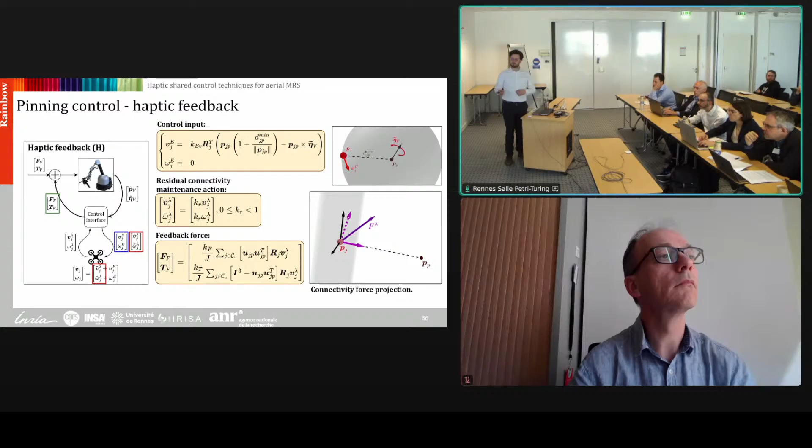And I saw that there was a comment about this on the thesis, on the pinning and the centroid control. Here, at first I put N, because N is the number of agents in the whole team, which is equal to J in this control mode.

Okay, and also for the first 2 modalities, single agent and pinning, how do you define - when you have a target location that you arrive at - what is the condition that you have to say, okay, they arrived at the target? So when I designed this algorithm, the way I did it is having a ROS2 node that simulates the objectives. This node will know the sequential objective location, the radius of the area, and detect if the drone within this area is of the appropriate color.

And for the centroid method, where there were areas to avoid, I tried a new technique, which is using Unity collision detection. So when Unity detects a collision between the cylinder and one of the agents, it would notify ROS and show the user a red screen.

Yeah, because for the centroid, you don't have a target location. No, the user just explores the environment. Yes, just a kind of coverage problem. Yes, while for the other 2 modalities, you have a target location. So, for example, in the single agent modality, if this agent arrives at the target location, that is done. Yes, exactly, that's the condition that you consider.

And this could have been done from the Unity visualization directly, but at that time I did not have much experience with Unity, so I did it from ROS directly.

Okay, last question in the interest of time - I have other curiosities, but maybe I will ask you later. Last question was about the assumption about the model, the dynamical model of the drones.

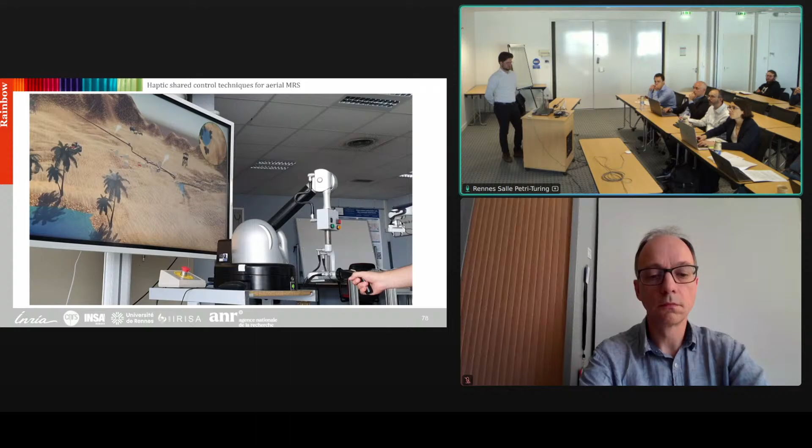So you consider only a kinematic model, a kind of 3D unicycle model, let's say. And as you also put in the conclusion, you are not considering the roll and pitch angles. So the question is, what happens if we consider a six degree of freedom dynamical model, which is also quite used in the literature.

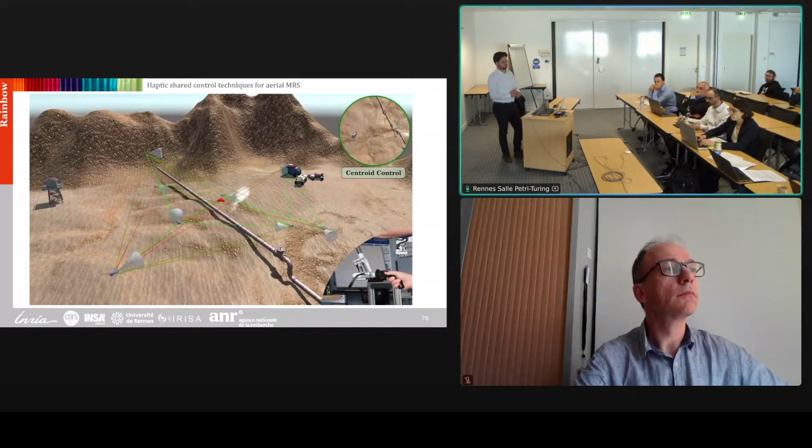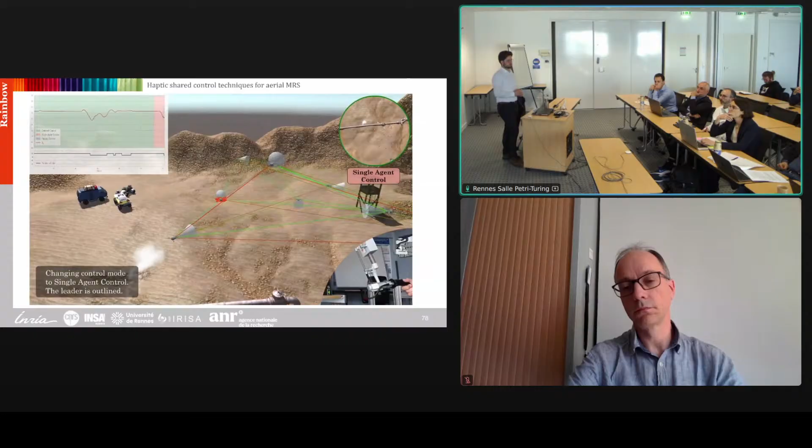Also another question was about this four degree of freedom kinematic model, but then in your simulator, the model that was actually considered was not exactly the same. You mentioned you have more like a double integrator with some limited acceleration, for the simulation. So how can you comment a little bit about all these assumptions of the model?

Sure. So, because we followed the connectivity force, velocity control inputs were sufficient to have effective results. It was shown in the literature and in this work, so that's why we consider only velocities and not acceleration models.

But however, we wanted to keep a realistic approach, and so that's why we simulated double integrator dynamics in order to have a maximum value for the acceleration of the agent. Because of course, maintaining connectivity when the simulated agent can have infinite acceleration on orientation and translations would really simplify the model and the assumptions, and we wanted to relax the assumptions and experiment with limited capabilities.

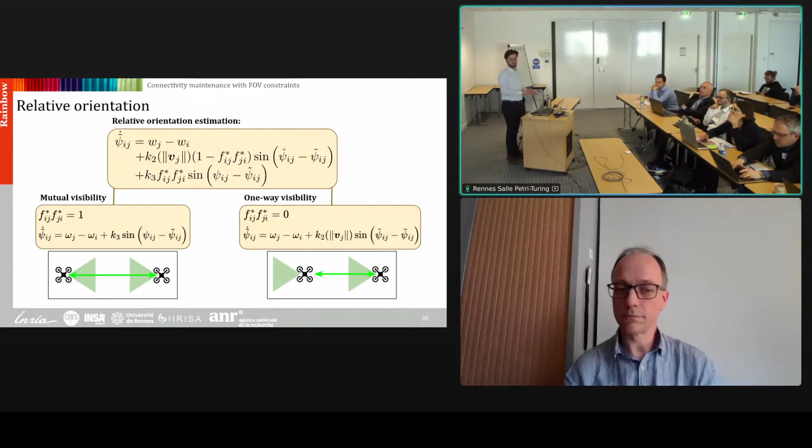The point is that mutual visibility would constrain too much the interagent relations. And we actually do not need mutual visibility because we consider that communication allows for retrieving the relative position measurement. So maybe it was not really clear in the document, but the objective is neither to prefer mutual visibility nor one-way visibility, it's to not consider it. That's why the weight is designed in this way, where if either one of the two visibility functions is 1, then the full symmetric weight is also at the maximum value of 1. So we do not enforce or prefer any of the configurations between mutual or one-way visibility.

Okay, but I think I need to return to your document to have a better understanding of what is possible and how to use this approach. It's okay, I understand the main principle. Thank you.

I would like now to go to the second part of your work, about the control with the user and the haptic system to control. So you mentioned that you have a distributed or decentralized system at the beginning. You speak about decentralized systems, but at one point you propose the centroid control approach.

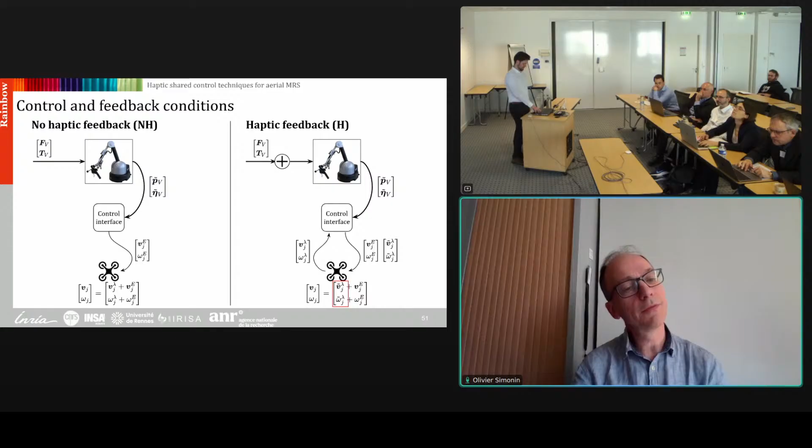Yes, and I was thinking, does the centroid control require full connectivity or not, and does this centroid control necessarily imply a centralized system or not? In any case, there is a central ground station that is not... each agent implements the connectivity maintenance algorithm on its own way and communicates with the ground station.

It's true that for the first and second control methods, communication is required only with the controlled agents, because the others are autonomous. However, indeed, in the centroid approach, we control every agent at the same time.

And also, which makes your question really interesting, is that in this slide we see that the Q matrix is actually a combination of all the QJ matrices. And so this has to be centrally evaluated. I didn't find in the literature a way to compute the pseudo inverse in a decentralized way, so indeed this computation has to be central.

Yeah, I think it's an open question at this point today. That's interesting that you clarify that for me. Okay, yes, but I think it's an interesting open question to explore.

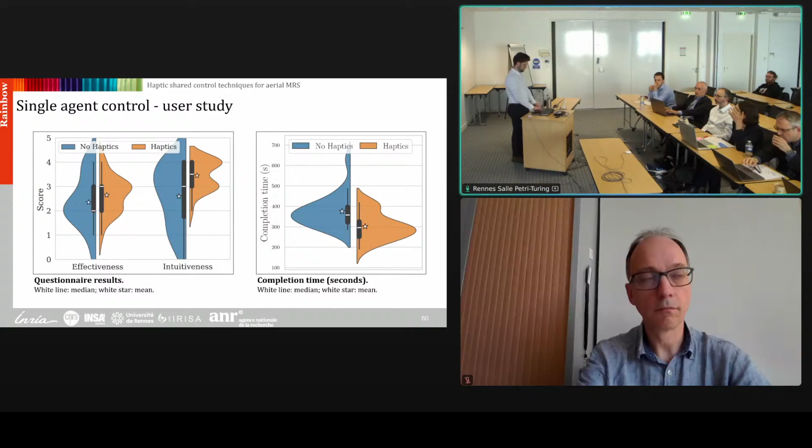Okay, my last question is maybe an open question. When you speak about your first algorithm about connectivity, you have this visibility term, which refers somehow to sensing. And when you speak about sensing, it's mostly about camera sensing. Yes. And we know we can do tactile sensing, being able to feel, especially when you embed this in the drones and you're able to feel the environment. So it means maybe not just when you have two drones - when you feel them it means they are too close to each other - but you could also feel the environment, and this could be of interest in addition to the connectivity between the drones. So what about having this tactile sensing in the visibility term? Is this something feasible for you?

Having tactile sensing in the visibility term, I'm not sure I understand. Yeah, because for the moment you only have camera information. Yes, so you have... but these weights are designed to constrain and ensure inter-agent interactions. So as you said, having tactile sensing between agents is maybe not so useful or interesting. I'm not sure - when the camera is not working, for instance, in a dark environment. I'm just asking if it's feasible, I know it's complex.

Adding new weights is of course feasible. The way the algorithm works is by multiplying all the weights together so that it remains bounded between 0 and 1. As long as the new weight follows the design requirements - the vanishing gradient and vanishing values for the weight - it's feasible to add new weights. The only thing is, we observed that when there's a multiplication of multiple weights that are between 0 and 1, the total weight becomes lower and lower, like 0.5 times 0.5 is 0.25. So sometimes the algorithm struggles to increase the gradient when multiple weights are below 1. Experimentally, I found that having multiple weights without adding more structure makes the algorithm a bit more unreliable. But it's still possible to add new weights depending on what interaction we want to model and ensure between two agents.

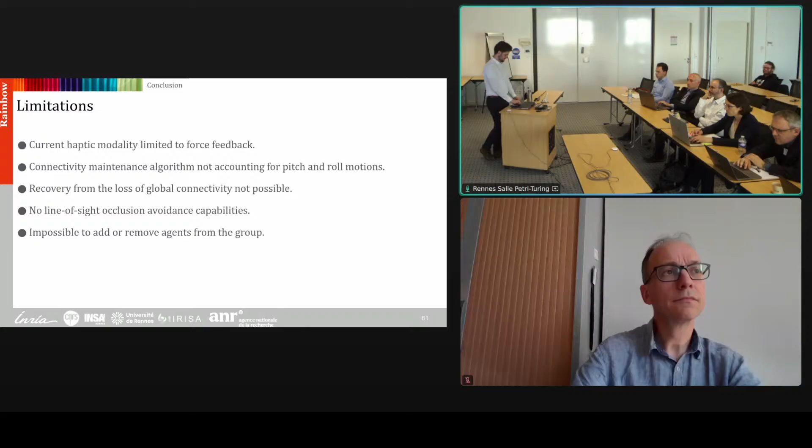One last very big question. You saw my work with a heterogeneous team, so you have a homogeneous team. If you were to consider, like for your DARPA Subterranean challenge, an heterogeneous team, how would you do that? Since you have cameras...

The way we design the weights is such that each weight can be parameterized differently for each agent. I tried multiple experiments: one where there was a blind agent, one where there was even a grounded agent, so the algorithm could not control its altitude. And I found that it is not a problem for the connectivity maintenance algorithm to adapt to such constraints.

However, having too many constraints is an issue—of course, if the team has a grounded agent, the flying agents cannot go too high in order to keep the other agents in their field of view. But having heterogeneous teams in this application just consists of adapting the hardware to a high-level controller interface, in order to account for the limitations of each agent and to parameterize the high-level controller to identify these limitations and account for them.

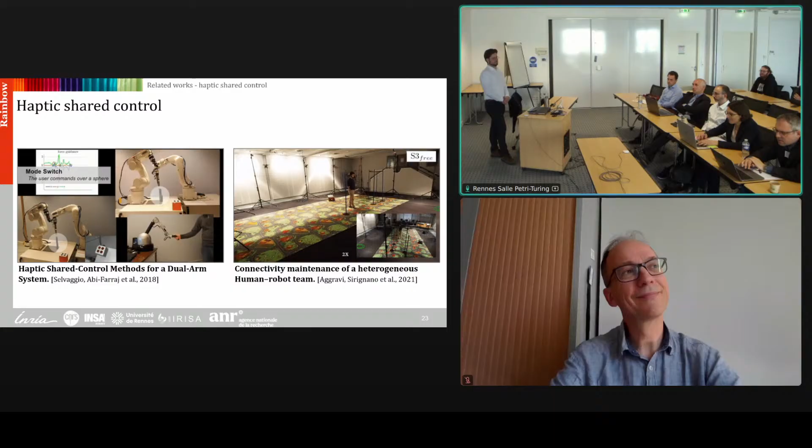Well, as an engineer, I would say most of the math theory was quite hard for me. It was really interesting to learn and relearn some things, because I still had, of course, some classes and courses about stability analysis. But using it as a tool, adapting it to my scenarios—like the work with matrices for centroid control—I always like to relate how mathematics are acting physically on the robots. And the more you go high and deep into math, the less easy it is to understand what's the actual action of what you do. The math magic, yeah.

So this was the hardest thing for me, I think. But it was still super interesting. And as you mentioned, I learned many things from many different fields: developing in Unity, using haptic feedback, flying multi-robot systems, even though I don't really actually fly. All this stuff is a really great package for, I think, my future in research. So great. So thank you again.

Okay, so thank you. So it's now time for us to deliberate. So, yeah. Olivier, do you have another link? Yes, you can use the link, my personal page that I shared. Okay, so I leave this one and I join you on the other. Yes, please. Exactly. Thank you. And you can join this one after if you want. Yeah. We'll come back. Okay.